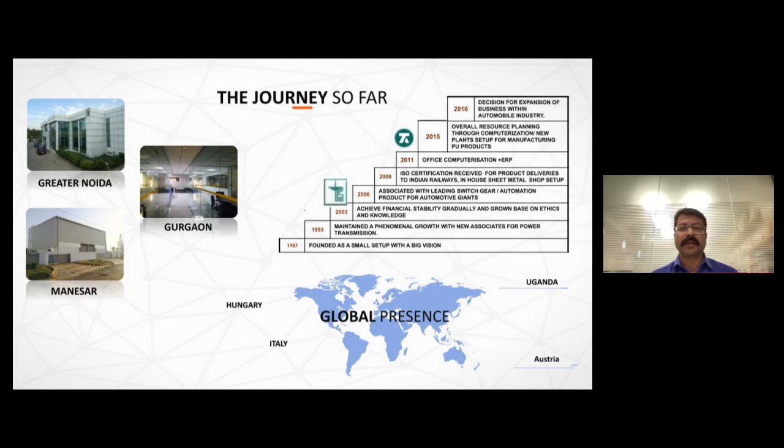We, Trinitron Group of companies, started in 1983 and have held the honor of being among the pioneering institutes of India in developing end-to-end solutions in automation, catering to the field of energy, mechatronics, electronics, software, and seating solutions for the industry and domestic sector in India and abroad. With a rich experience and rapid growth in industrialization and globalization, we expanded multifold to match up with the growth rate of the globally fastest growing Indian economy.

We again welcome all the delegates to go along with us on the journey of our product presentation. To start with, we are an approximately 4 decade old company which has been working rigorously on power distribution panels, product development, and energy and product management and monitoring. We have also got an in-house consultancy facility available for EV solutions and seating systems.

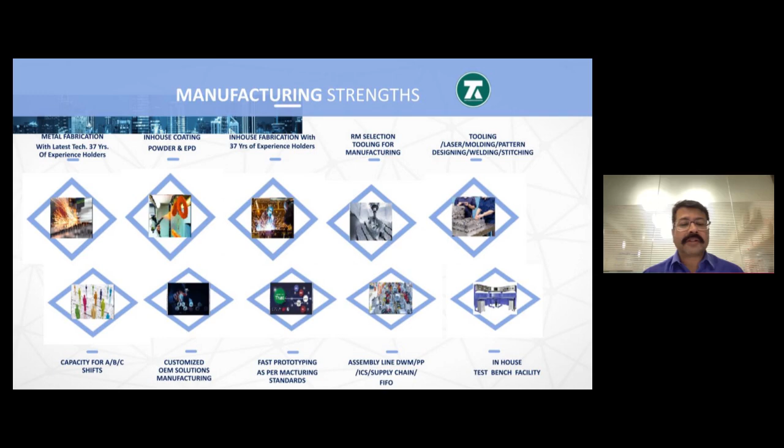We have got a vast experience in the manufacturing background, with 3 manufacturing plants: one situated in Bilaspur Haryana, one in Noida, and one in Greater Noida. Our head office is in Delhi, and our innovation cell, which we recently started pre-Corona time, is in Gurgaon, DLF Corporate Greens. Now, coming to the main agenda, that is the product presentation.

Our philosophy is: your problems is our mantra. That means we basically focus on your problems and pain areas, and we try to convert it into a solution to help you ease your problems and pains and have a more systematic and easy way of working.

When we go through our long range of product offerings, we are working on turnkey and greenfield projects which involve civil, power, and utilities altogether, consultancy in electrical and electronic softwares, solution design for and development of product lines, fast prototyping in plastic, metal, and food grades, and process automation for manual and automated solutions.

We also offer air curtain automation, required for greenhouse effect reduction, and lock management systems - keyless entry systems for different facilities. Apart from this, in the automation part, we go for online energy monitoring systems and controls, and online thermal monitoring systems and controls.

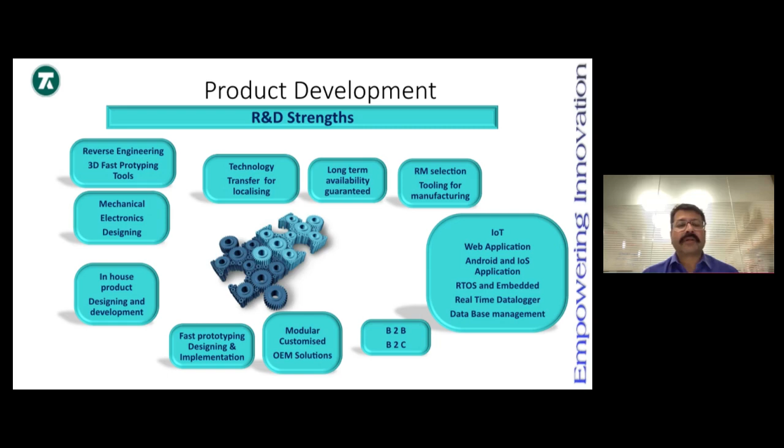For this R&D, we have a big team which is working round the clock to give solutions to our clients and ease their pains.

When we talk about customized software solutions, we work on basically a cycle of 6 parts: planning, analysis, design, implementation, testing and integration, and maintenance. So we follow the complete software design cycle, and we are already catering to a number of clients, giving them software solutions - it might be for automation, process automation, data analytics, and so on.

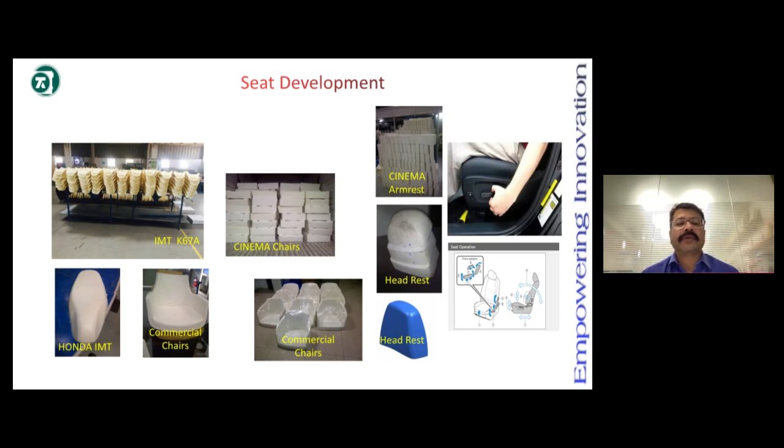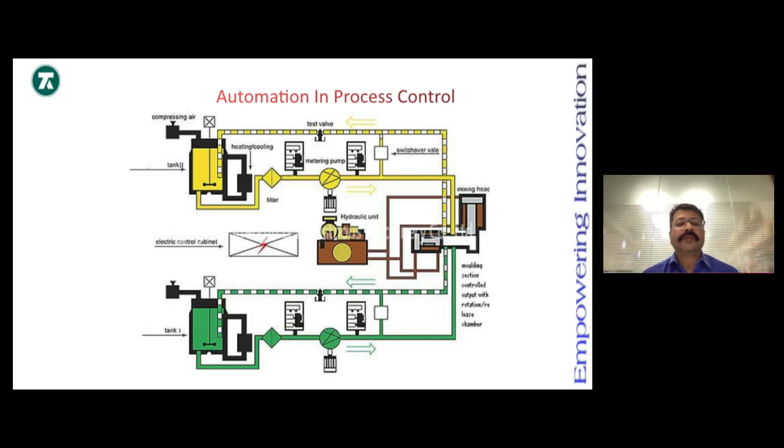When we talk about seat development, these are a few glimpses from our Bilaspur plant, where we are manufacturing seats and supplying them to T1 suppliers for all the OEMs in the automotive industry. This is the automation and process control which is used in our systems.

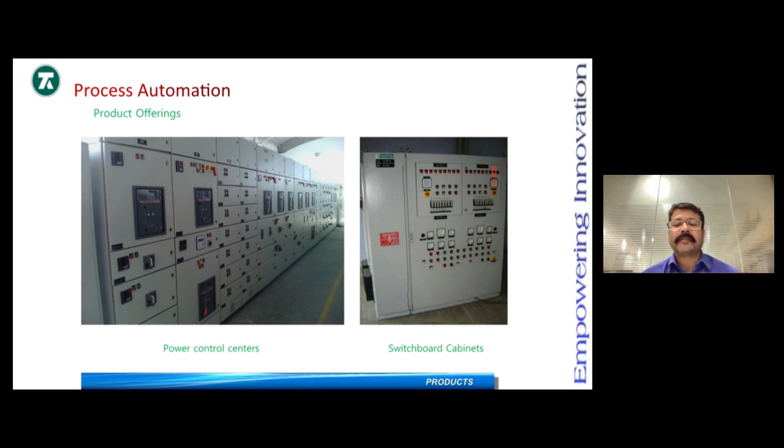When we talk about power panels, we have a lot of offerings to give, starting from power control centers to switchboard cabinets, PLC based panels, relay control panels, capacitor panels, numerical relay panels, and so forth.

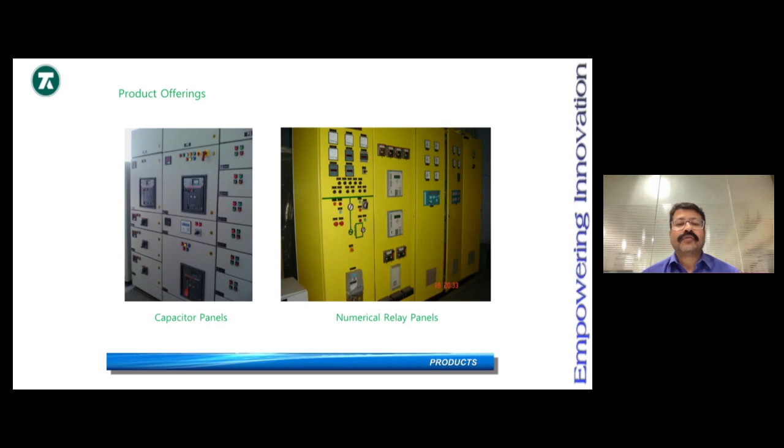When we talk about the energy monitoring system, we have a state-of-art energy solution with multiple energy source synchronization, all power source information at a click of a button, power optimization through artificial intelligence, and monitoring the health of all devices present in the premises connected with energy. Control of the facility can be done remotely, with minimum manpower intervention required, and all the statistics and data is on the database for backend calculation as well as design decision making.

Then we have another system called the alarm monitoring system. It monitors all critical parameters like fire, temperature, humidity, AC status, DG status, etc. It gives a real-time update on the server of the status of different parameters coming from different systems, with an IoT platform to monitor and give alarms on the fly. Escalation, in case any further intervention is required, is done automatically through the IoT platform or through the application software. Customized IoT platforms as per customer need is our forte.

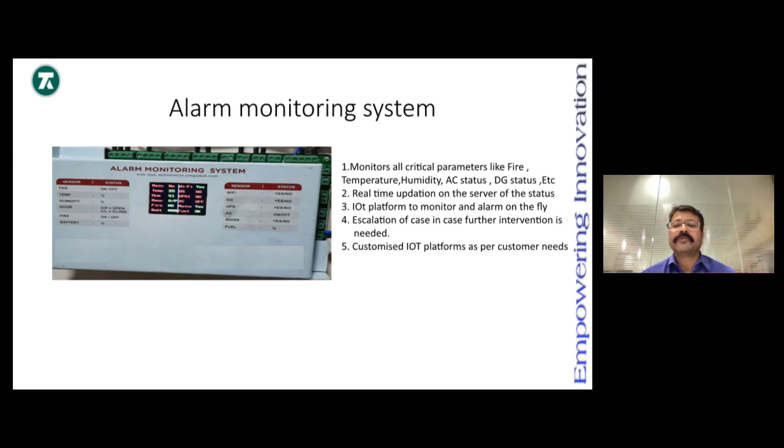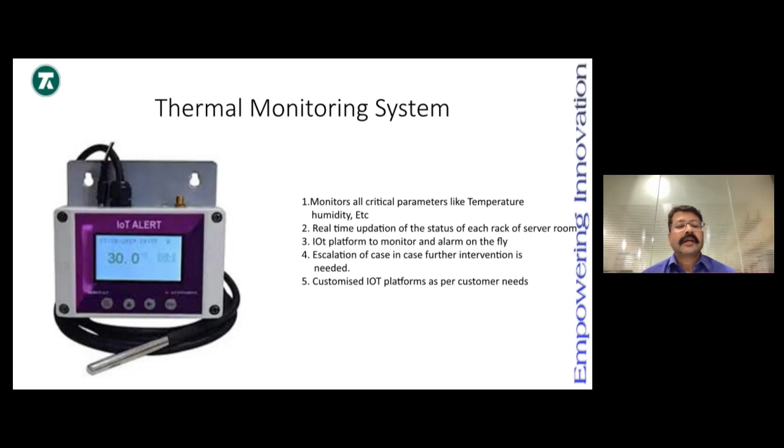Now coming to the thermal and humidity monitoring system. This system has been designed specifically for server rooms where monitoring and controlling temperature and humidity is a must. We have designed systems which can monitor 24 by 7, 365 days a year, recording all information in real time. It provides updated status on the IoT platform as well as the application, and generates alarms if required, with a customized IoT platform depending upon the need and user application.

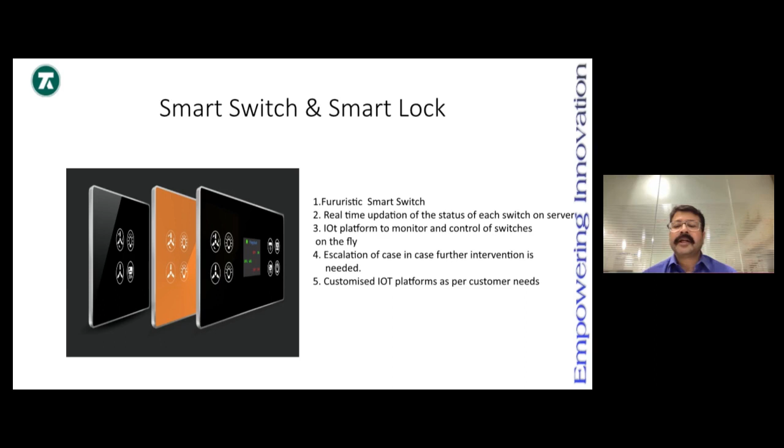Another vertical we are holding is the smart switch and smart lock. These are futuristic smart switches with real-time updation of status on the server. It is connected to the IoT platform to monitor and control switches on the fly through your mobile, with escalation of cases in case further intervention is needed. Suppose your children are alone at home and require some intervention, you can control the complete switch system through your mobile. This is a customized IoT platform depending upon domestic or industrial use.

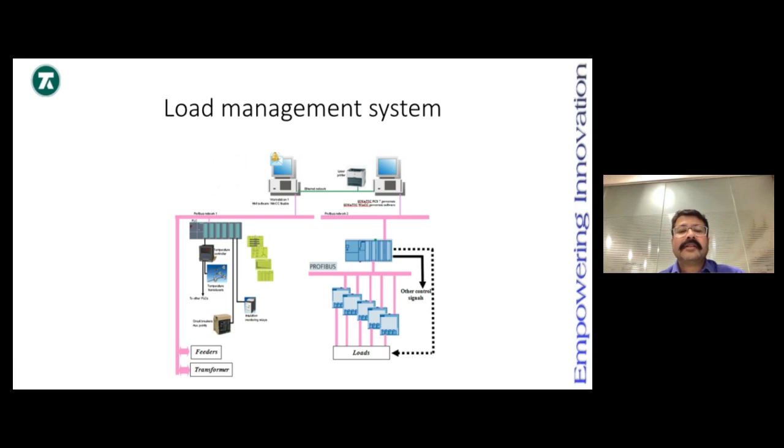Then we have a load management system which talks about balancing the complete load, whether coming from the main grid, solar, or genset, synchronizing everything so that optimization can be done, resulting in a lot of power saving as well as cost saving for the industry.

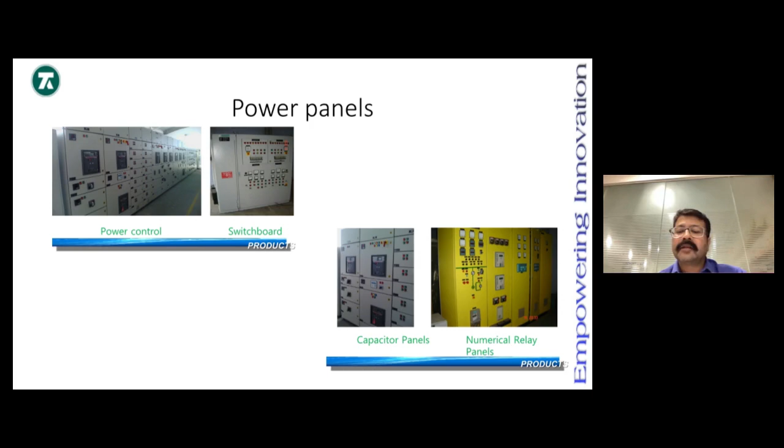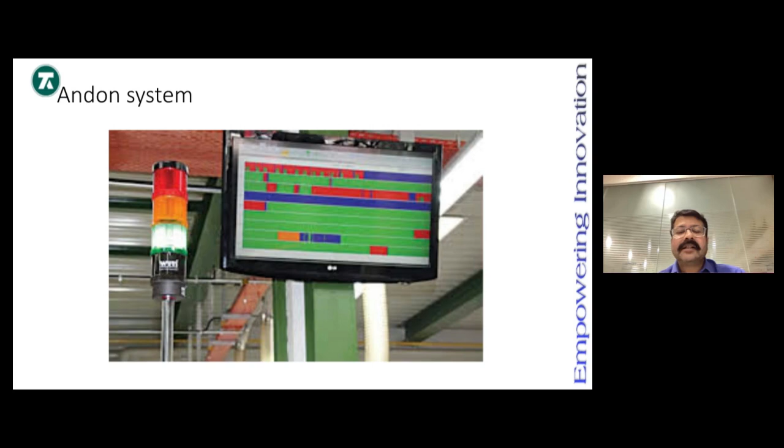It consists of power panels, power control, switchboard, capacitor panels, and numerical relay panels. We have been supplying Andon systems to all the OEMs, which gives information about faults coming in the production line, different alert messages, different green signals for perfect working, and so forth.

Coming to a new system, which is RGB automation for guides and alerts. Earlier, a yellow line was used for guiding pathways and other things. But eventually, when LED technology developed, LED became one of the primary sources of lighting. Using this technology, we have designed a complete guiding and alert system for domestic as well as industrial use, which can be used for evacuation in emergencies, as well as decoration for household activity, or for conference halls and premises in the office.

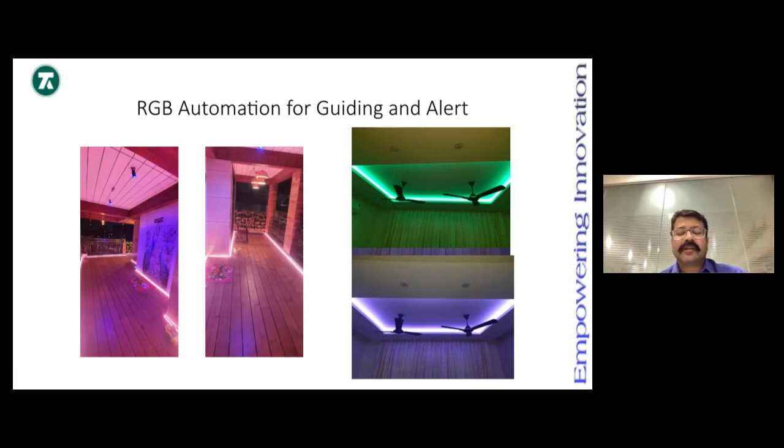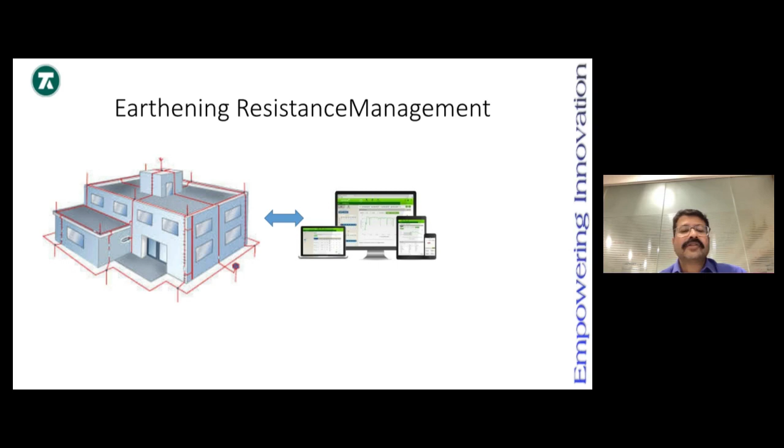Another in the line is earthing resistance management, which connects all the earthing arrangements of the facility at one point and gives IoT information about each and every earthing pit. It gives the health of the pit and information about earthing resistance values on the fly, so you know which particular pit requires your attention immediately.

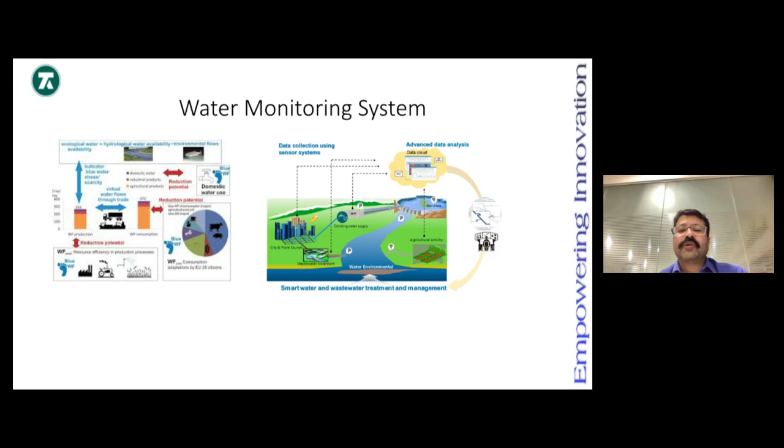Similarly, the next element is water. Nowadays, water footprint is a key phrase used around the globe. Keeping that in mind, we have designed our water monitoring system, which controls water wastage, tries to reuse water, and monitors the complete water footprint in your premises. It helps reduce water requirements and natural resource use, and also helps reduce cost to the company by reducing water load.

In line with water management, we have a water alarm monitoring system which can be used for controlling all overhead tanks as well as underground tanks if there are any problems related to level management.

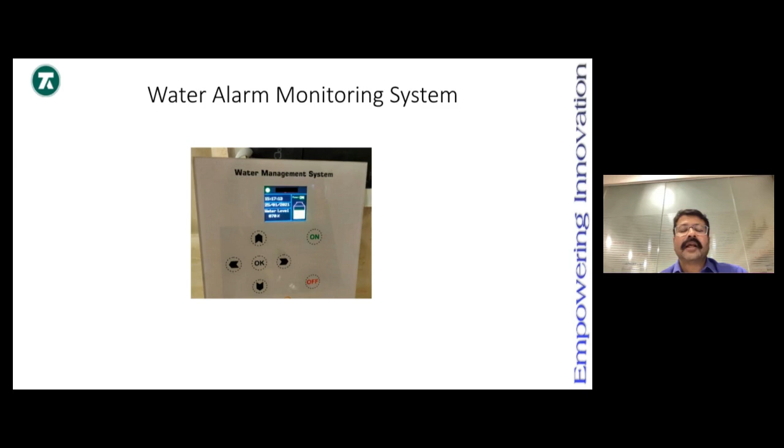Then we have a rainwater harvesting system, which is also an automated system connecting all the different ducts coming from the rainwater harvesting lines to the main block, where it controls and checks that everything is in line and the water is actually going into the earth. If required, water from one pit can be pumped to another pit if one pit is not able to absorb all the water. This helps improve the water table in the complete premises equally.

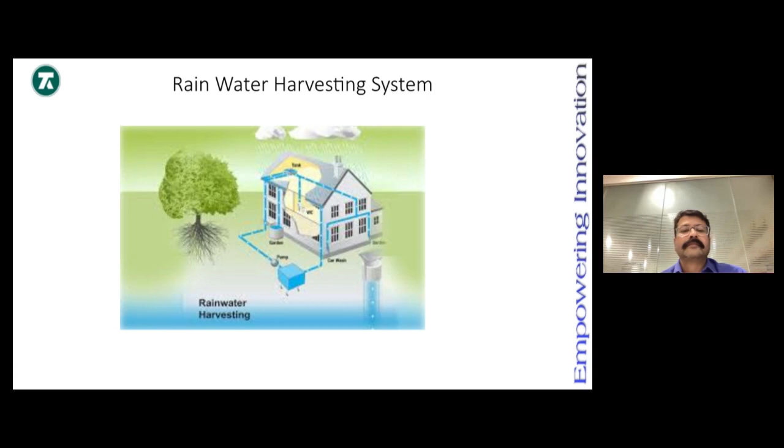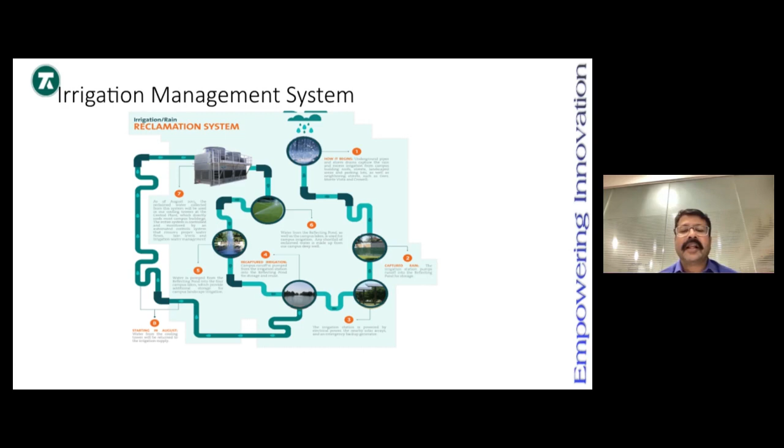Adding to this, we have an irrigation management system. This works with different technologies like drip irrigation, sprinklers, and many others. We use STP reused water, which can be connected and recirculated for irrigation. It also checks the water requirement depending on the plantation, so there is no excess or deficient water in irrigation, and the plants can have a healthy life. Thank you.

After water, we have got air. So we have designed a system for measuring air components like NOx, SOx, CO, CO2, and HC in factory premises as well as basements. This helps ensure the air is healthy enough for the humans working there, as well as for machines that require certain air quality, like DG sets and others.

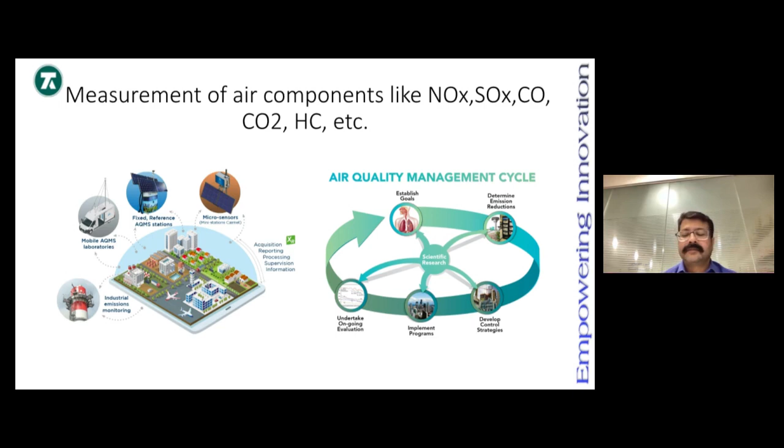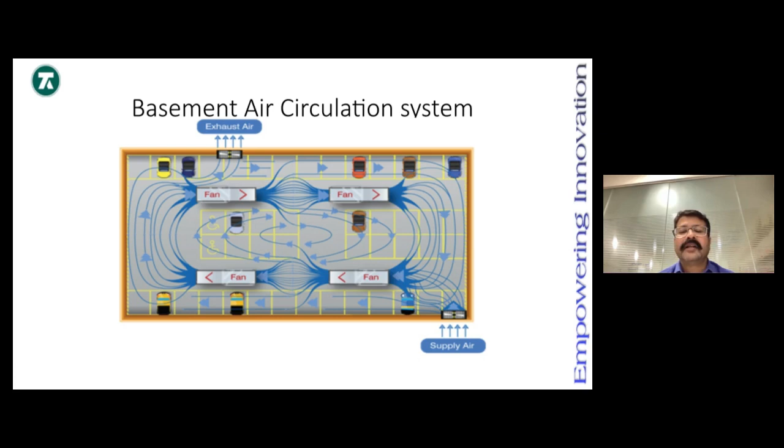Similarly, we have a basement air circulation system in which we measure different components of gases present in the air, and accordingly the automated system controls the inflow and exhaust to regulate the complete air and maintain air quality for breathing purposes.

After air, when we talk about sky, we have a cloud-based surveillance system using drones. This system is under development, and maybe within a year or so, we will come out with this particular product line.

With this, I want to bring an end to my presentation. Thank you so much for your kind attention. And I must say...